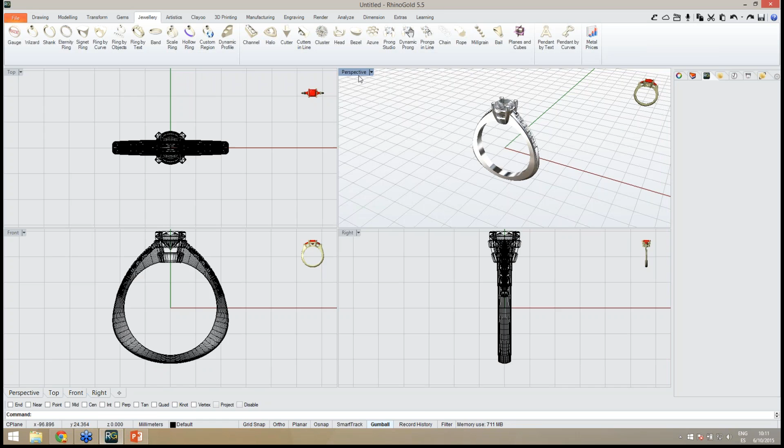We just click on the model we want to use, and now it will be added to the document. As you can see, we can load any model, and of course the big advantage of using elements is that we can customize all the parameters.

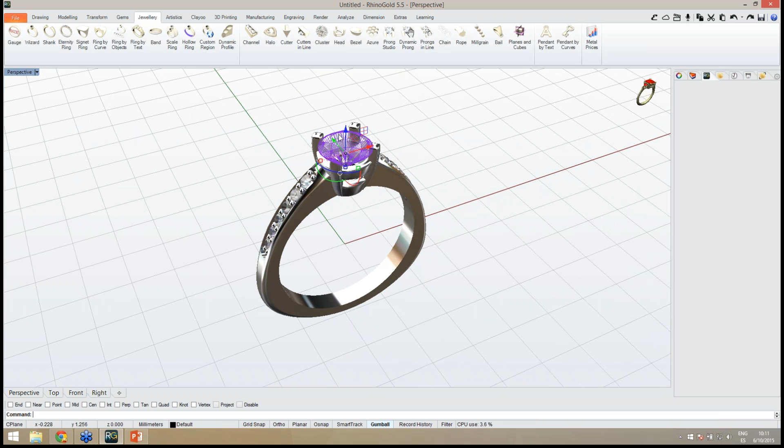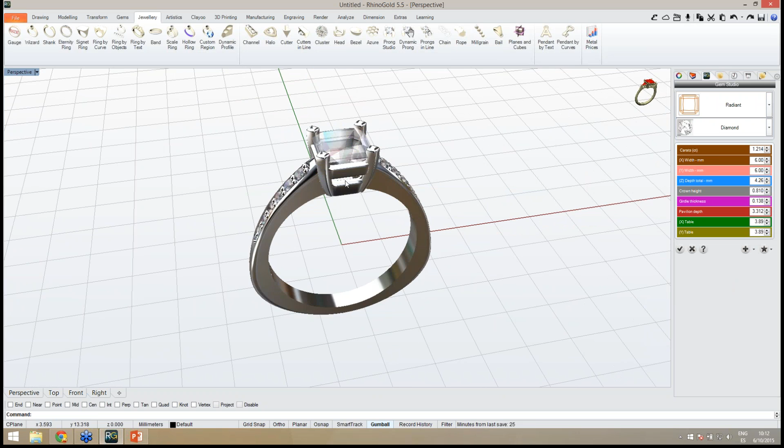For instance, let's see on this model, if I want to customize the gem, at any moment I can select the gem, edit the gem, and from here I can change to a different gem cut. Let's see what happens when we change the gem. As you can see, automatically the head will also update. So this is the main idea.

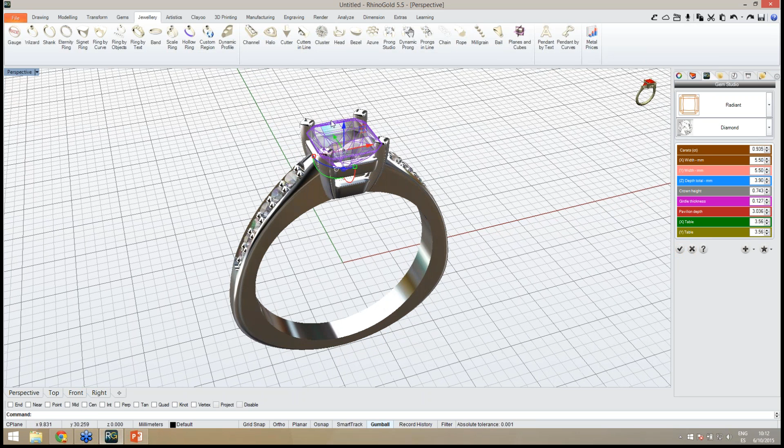We can edit everything. So let's say I want not only a different gem cut but a different gem size. If I define a new gem size, the idea is exactly the same. It will automatically adjust to the new gem, and of course the same with the head. Let's see the head and the shank.

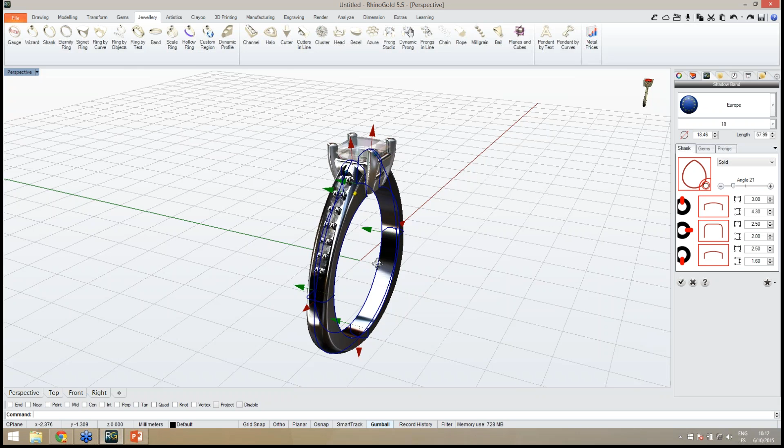If I select the shank and want to adjust any detail, for instance the number of gems, the size, all the details we can easily customize. The ring size, as you can see in the side panel, we can apply different profiles.

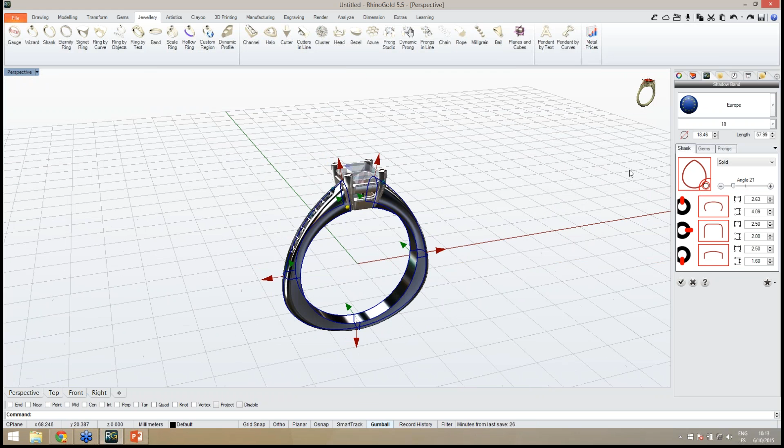For instance, this one. I can also change the main shape of the shank. Instead of this European shank, I can make a regular shank, a round shank, and easily we can use any of these elements and adjust exactly as we need.

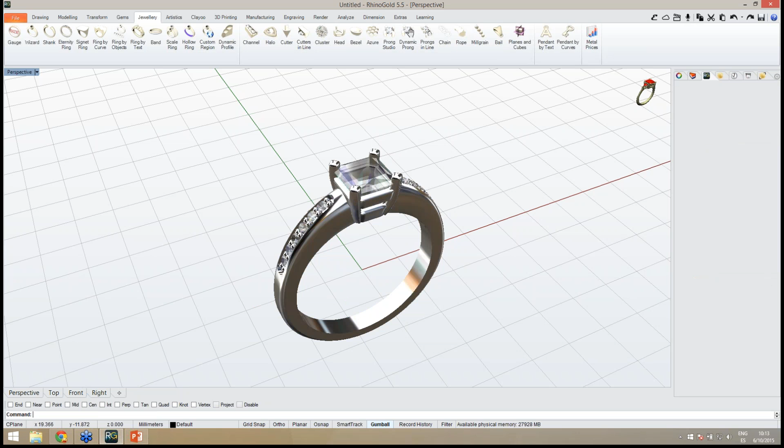We will see more parameters, more features, but I also want to show how easy it is, from a predefined model, to adjust the parameters, and we can easily create a render. As you know, let me show you.

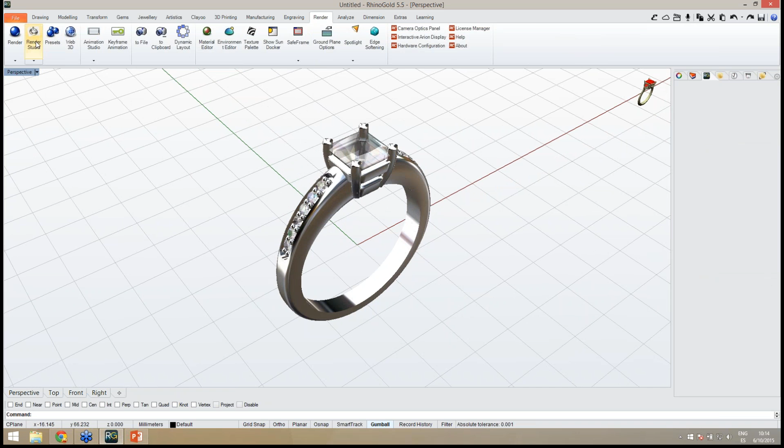From this model, we can show the customer a photorealistic image. Let me apply the render materials. As you can see, when I open the render studio, I have all the render materials in this side panel.

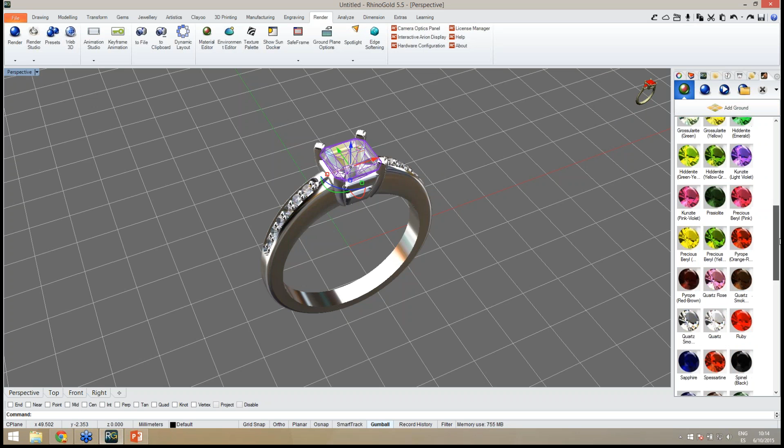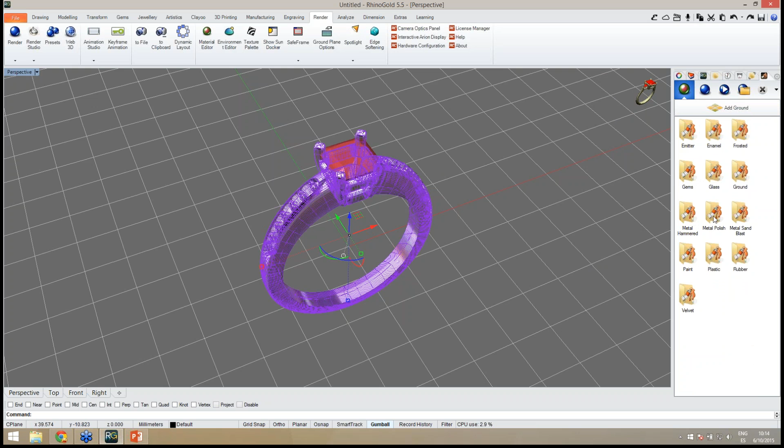For instance, let me show you a ruby on the main gem. Let me apply diamonds, and of course the metal. I can also apply any material, for instance metal polish and white gold, and easily create a render defining the resolution.

From here I just click on render and it will start calculating the image. Of course, we have several parameters we can define. It's calculating the photorealistic image. So from one model, easily in a few clicks we can get the image, and I will also show you how easy it is to export to STL for 3D printing.

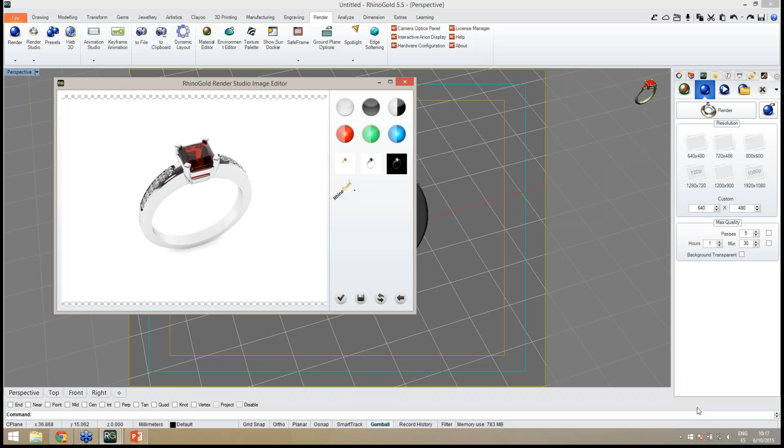Render example. Just save it, and also from here, let me just close the render, and from here we can export for 3D printing, export in STL.

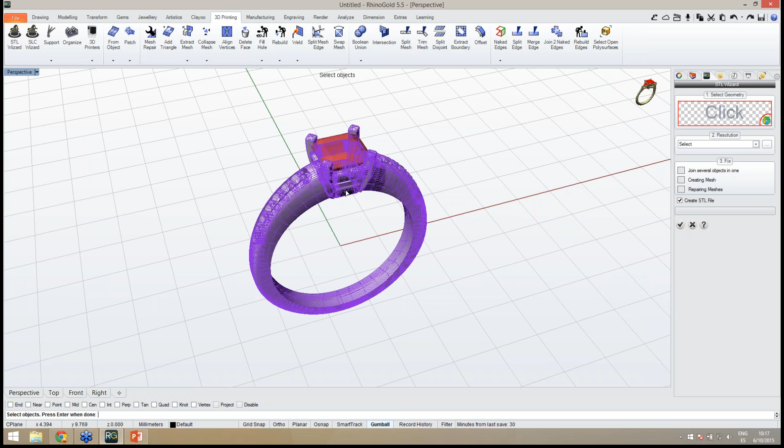So I just go to the 3D printing tab, and from this model or any other model, I just open the STL wizard, I select the objects to print, and of course the resolution, and here we go. We just need to save our file, ready to send to print.

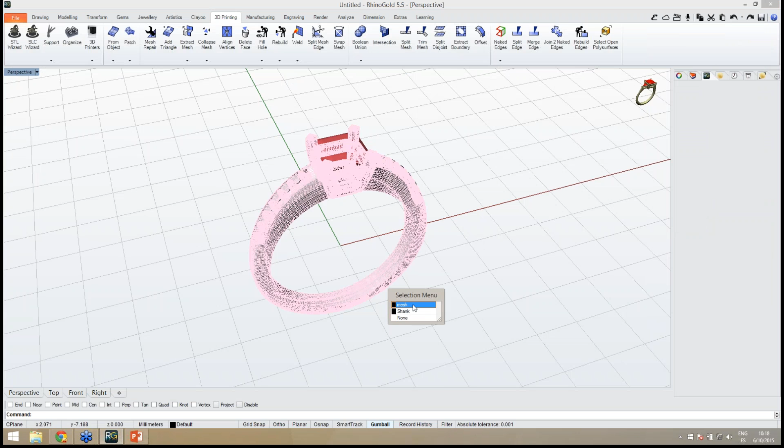As you can see, let me just show you the STL file. As you can see, easily we can send this model to print.

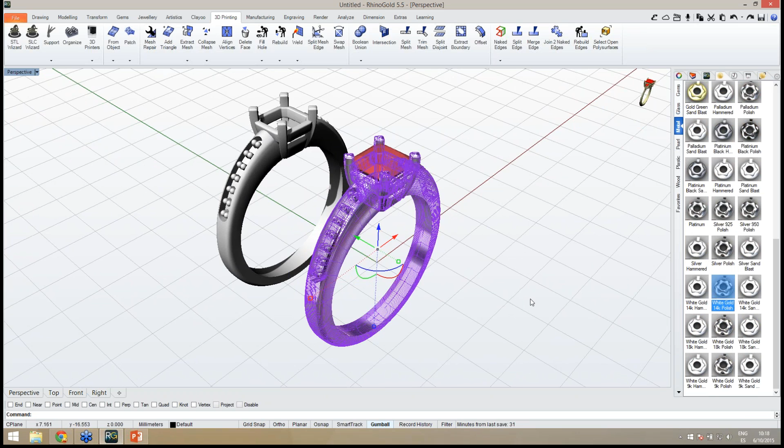We also have all the information before, let me just show you, when we have the materials applied, for instance in white gold 14 carats, we can easily know in this metal weights panel the weight for the model. As you can see, we can provide all the costs to the customer before production.

Raymond, I don't know if you want to translate, otherwise maybe it's too much. No, it's okay, I can briefly translate that.

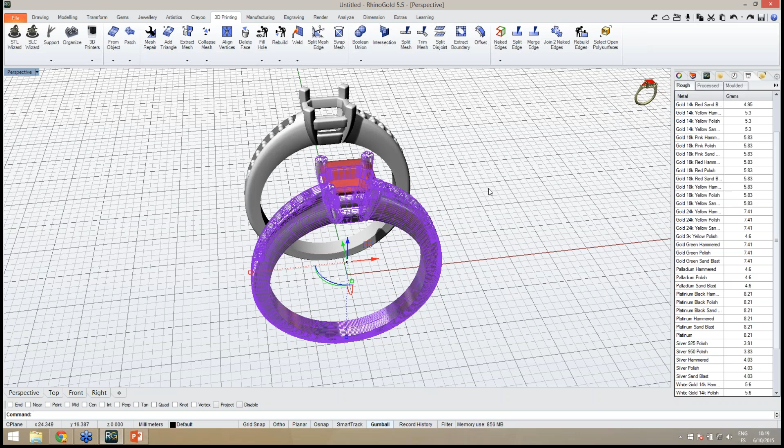Yep. So I want also to show you the other families, all the elements we have available. Let me open a new file and show you what else we have available in elements. So each different family, each category, we have several models.

For instance, we have in here several signet rings, and we can also add them, but in this side panel we can define the ring size, we can define the material before adding the model to the document. So this is the signet ring category.

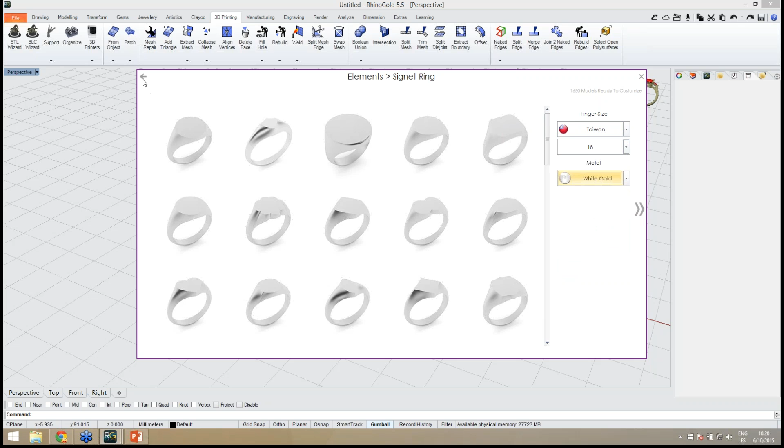We also have the wedding rings, and in here, as you can see, we have several different wedding rings available, and all of these elements are ready to customize, to adjust the parameters exactly as we need.

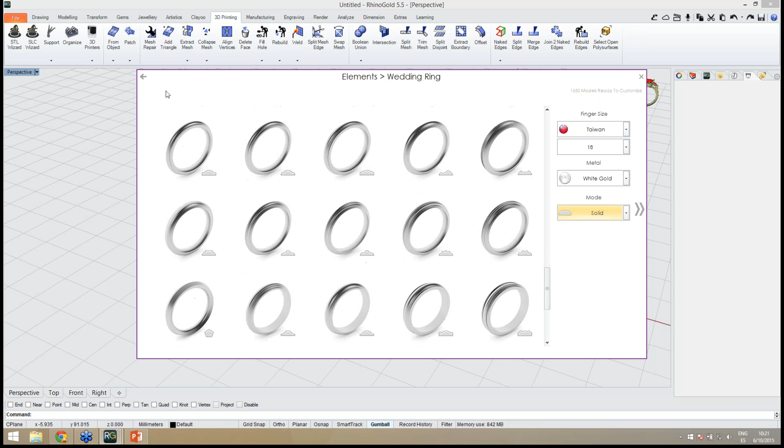So when we add the model to the document, we can define all the materials, all the ring size, all the options available. And let's see other families. We have in here, for instance, the next one, eternity rings.

And in here we have a few more options, like the material for the gem, the gem cut. So easily we can add any model and work based on this predefined model.

Now it's really fast and we don't need any CAD skills to use it. It's really easy. So this is the 3 stone rings category. As you can see, we have some models ready to customize.

And of course, shanks. There are several options using the shanks. We have lots of different shanks ready to use.

Today there are 1,650 models in this RhinoGold element, but our plan is every month we will update this library. We will add more and more models. So the idea is within 2 to 4 months, have already 2,000 models. In half a year, have 2,500 models, and of course all of these will be free for all the RhinoGold 5.5 users. I don't know, Raymond, if you would like to translate that.

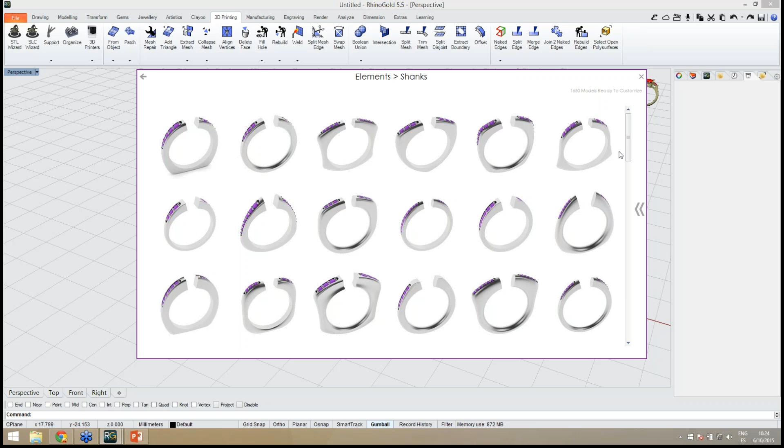Thank you very much. So here we are. We are now at the Shanks library. I would also like to show you how to combine different elements. So, for instance, if I start with this shank, and as we have seen before, we can adjust all the parameters.

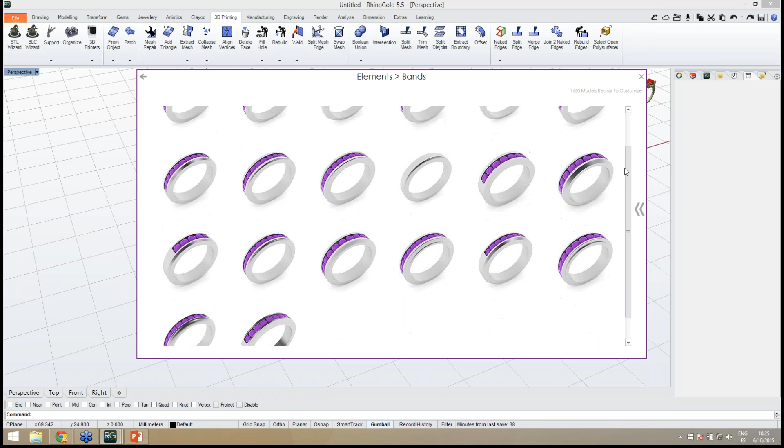But if I want to combine different elements, I just open elements again, and for instance now we have also the bands. To create the shadow band, we have, for instance, the heads. We have several heads. Let me, in this case, probably instead of a head I will use a bezel.

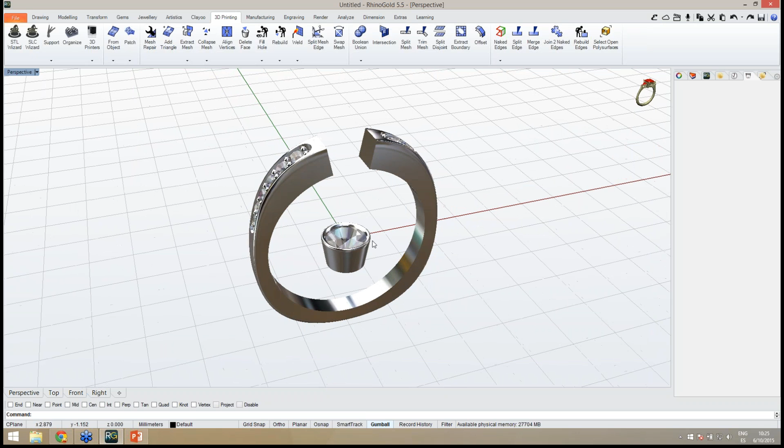So I just need to select the one I want to use, so can be this one, for instance, and easily I just select the model, I adjust the position, and of course I will just need to adjust, for instance, in this case, to edit the shank in order to fit exactly with the bezel.

So easily I can adjust the angle, I can adjust the measure. Remember, with double click we can define exactly the measure we want to apply, or we can also use these side panel parameters to adjust them.

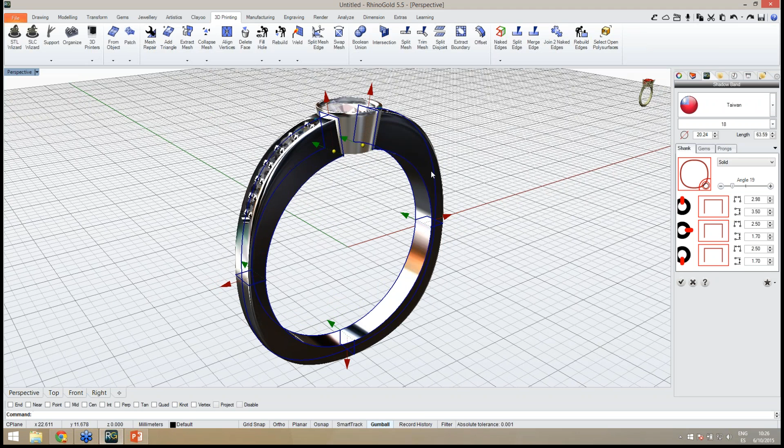Also, as you can see, for instance, in this shank, we have the straight fit inside. We can also adjust comfort fit, heavy comfort. Let me show you how it works. If I define comfort, as you can see now, we have rounded inside. We can of course adjust the height.

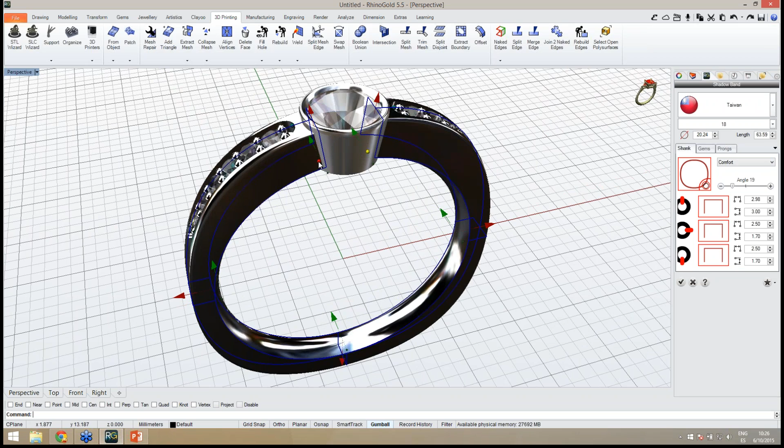Everything we can customize in a few clicks. So it's very easy and fast to define any model. So as you can see, yes, yes.

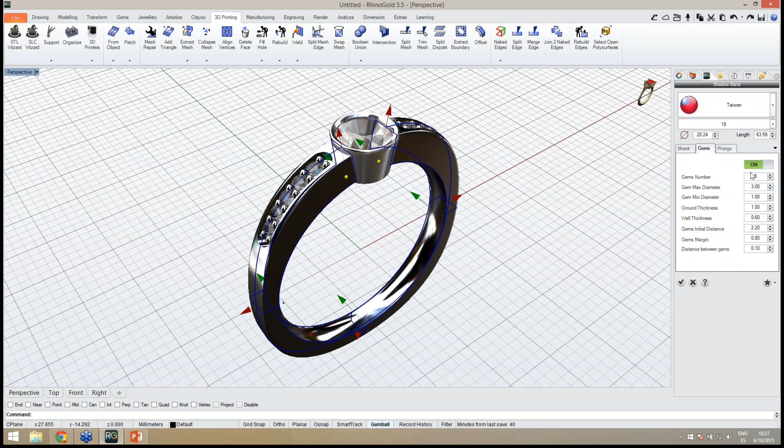Thank you. So as I was saying, we have all the parameters ready to define. Okay, now instead of 6 gems, I want 5 gems, or I can also disable the gem, so we can really customize everything exactly as we need.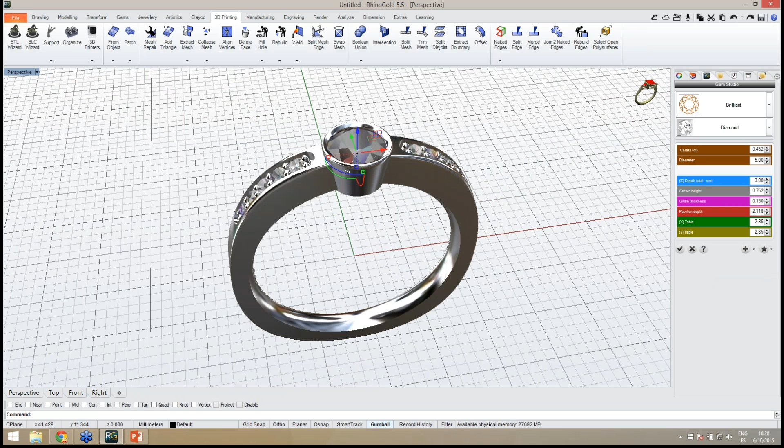Of course, also the prongs on the shank, and as we have seen before, we have the possibility to easily adjust to other gems. So I just edit the gem. For instance, I want now a princess gem cut, and as you can see, automatically we will have the bezel adjusted to the new gem cut or the new gem size.

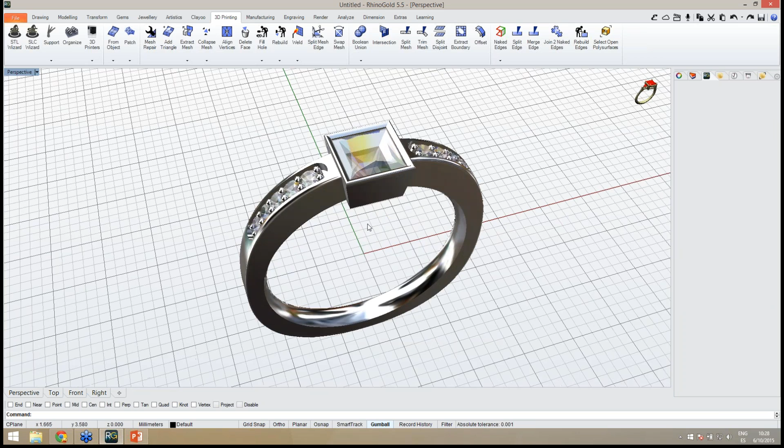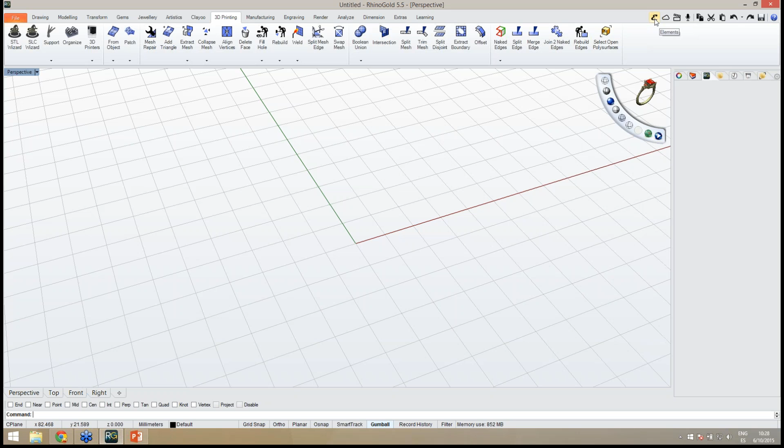So it's really easy to use it, and I believe it's now really fast to make any model or to customize all the parameters. So let's move on and see what else we can find on elements. Let me just delete this model and I will open again elements.

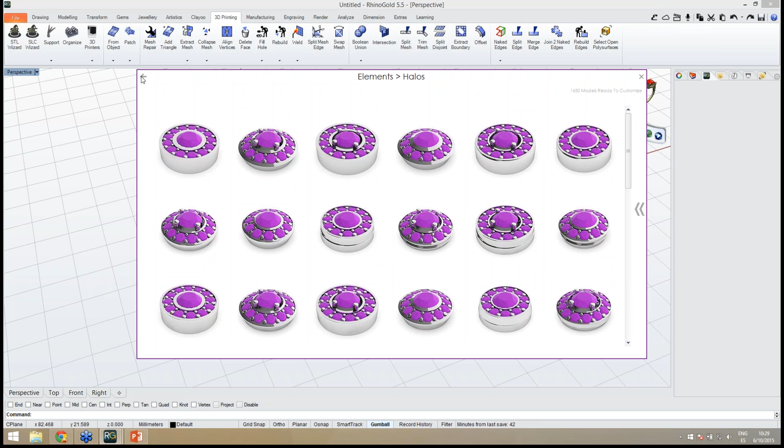Of course we have several possibilities. We have clusters, so we can use any of these. As you can see, we have several options: clusters, halos. So easily we can load any of these and adjust exactly as we need.

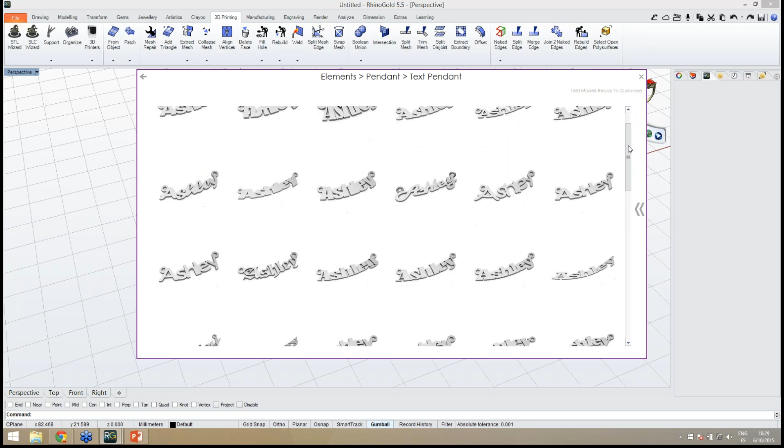And for instance, in the pendants category, we have the standard pendants, with the bail and the main gem, but we also have text pendant. So easily we can use any of these and customize the text, the font, the measures, everything. So it's really easy now.

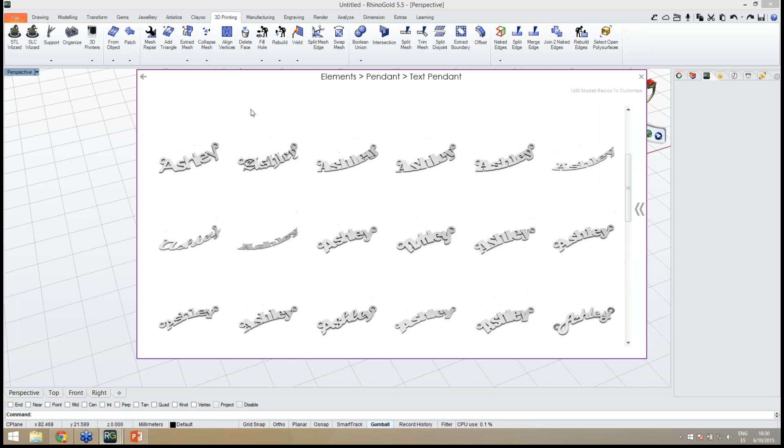Thank you very much. So as I was saying, we have the text pendants, we have also the curve pendants, and in here we can load any curves and automatically it will adjust to the parameters we define. There are really lots of options, as you can see.

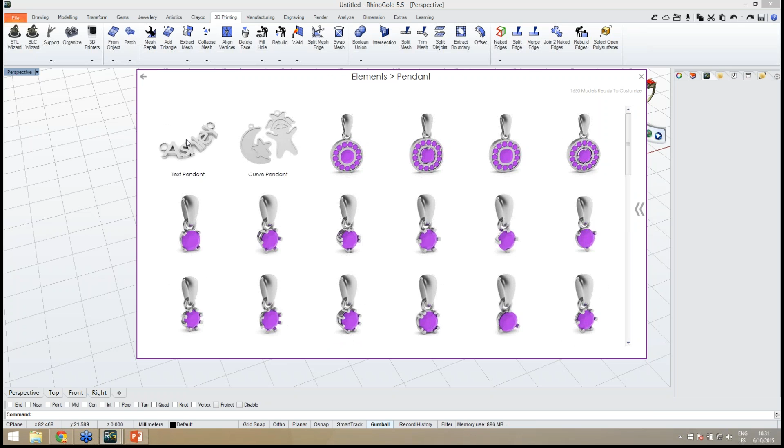In this case, the pendant family. We have also the earrings. So as you can see, we have different types. We have hoops, we have with gems, we have a few different options. And of course, we have also some bracelets. As you can see, we can start from any of these and customize as we need.

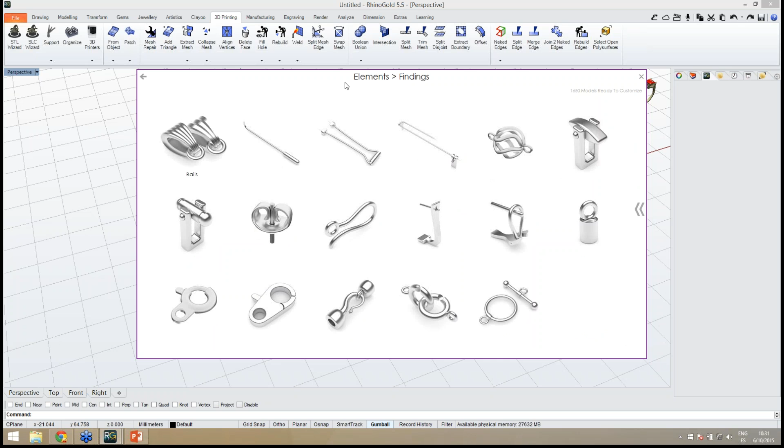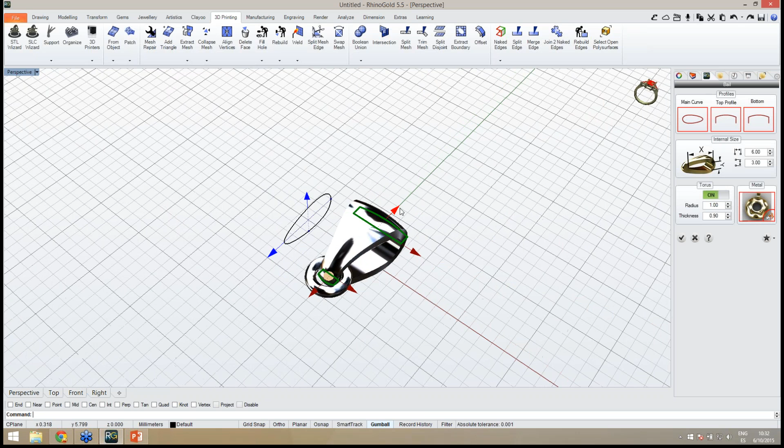And of course, the findings, as you may know, it was already available in RhinoGold, but now we also have the bails completely. We can customize easily any bail, so we can just load one of these, and now we have also the options to edit and of course adjust the measures or different profile. For instance, I want to create a profile like this. So this is really easy now. This is just an example.

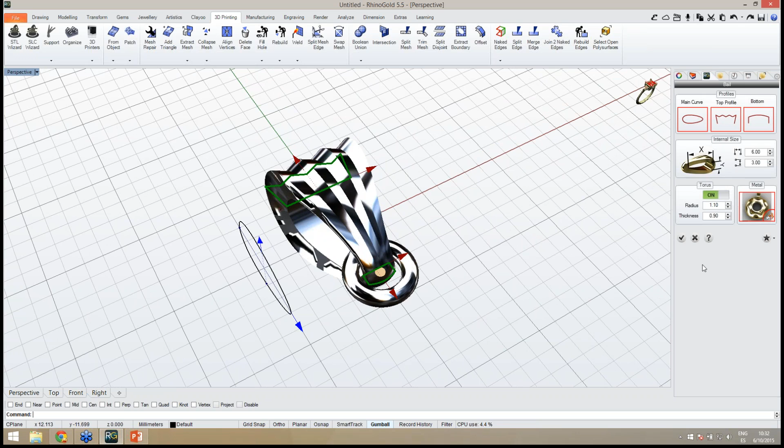We have also the torus options, the radius. We can easily define the position and of course the material. So as you can see, it's really interesting. Let me show. Okay. May I? Yes, of course.

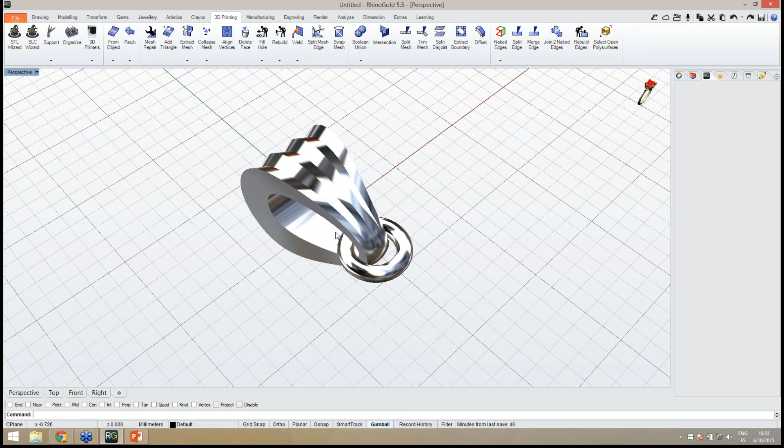So let's see what else can we find under the elements. And so now we are loading, and there are also several text options. We have text pendants, as we have seen before, but we also have text rings, and we can easily define any text. So easily we define the words, and of course remember we can edit, so it's really fast now.

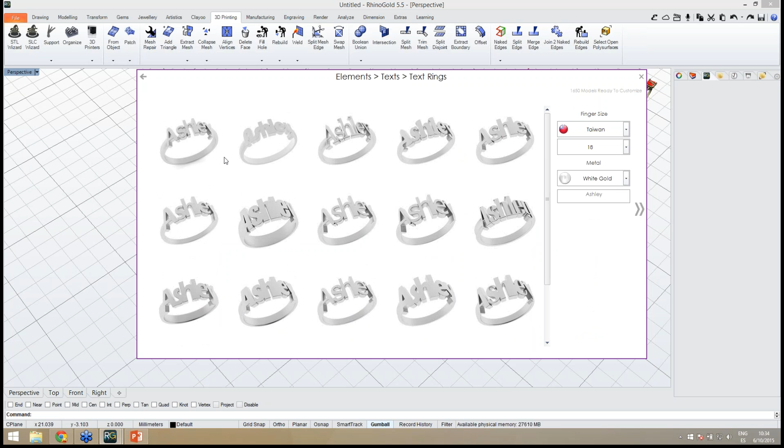For instance, these text rings, we have letters, so in here we will find several different fonts, and of course inside each one we have all the options ready to be used. So what else we have? Let me just go back.

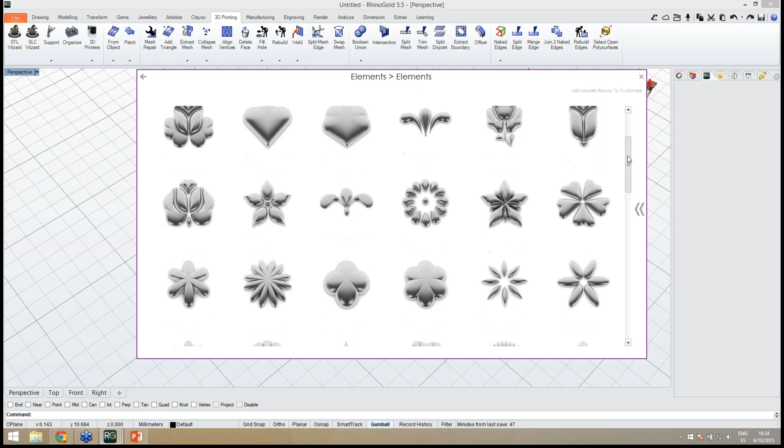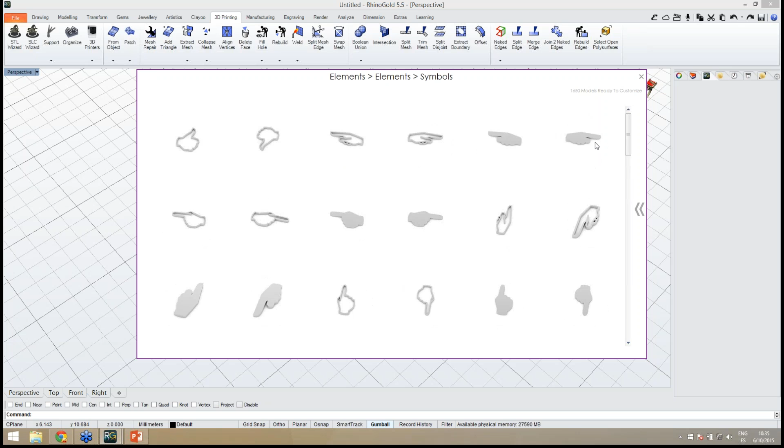And in here, the elements family, we have, as you can see, different elements, different models ready to be used. And of course, from here, we can adjust the measures and apply these different models on a ring, on a pendant. We can easily combine all these elements. Of course, we have in here also the symbols, and in here we will find many more, as you can see. So there are very much to be used, and of course combine all of these to create a custom model.

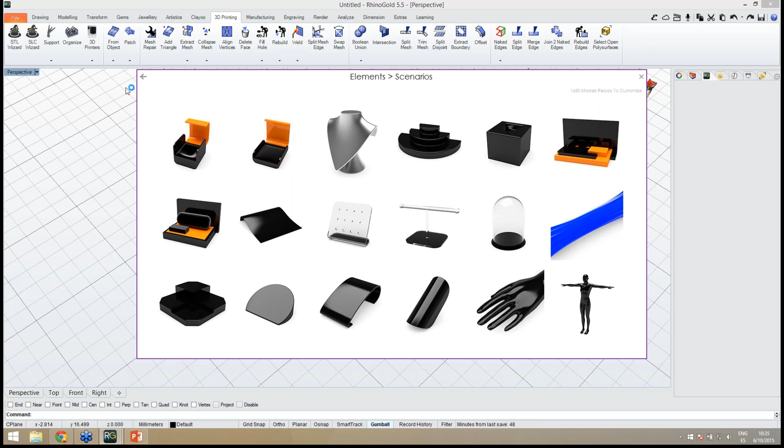So also the scenarios are available if we want to create a photorealistic image or an animation with all these options. We can, for instance, use one of these scenarios to improve the quality of the presentation. So let's take a look a little bit on how to edit, or how to play a little bit with these options. For instance, let me start with this model, this 3-stone ring. And Pedro, may I? Of course.

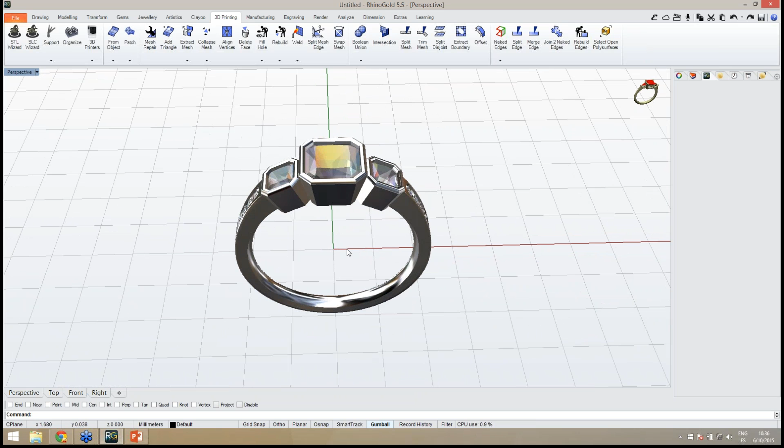Thank you, Raymond. Thank you very much. So, for instance, once again, it's really easy to adjust the gem size, and it will automatically adjust the bezel. Of course, we can at any moment edit the bezel and adjust or create one arcing here, so easily we can customize the model as we need.

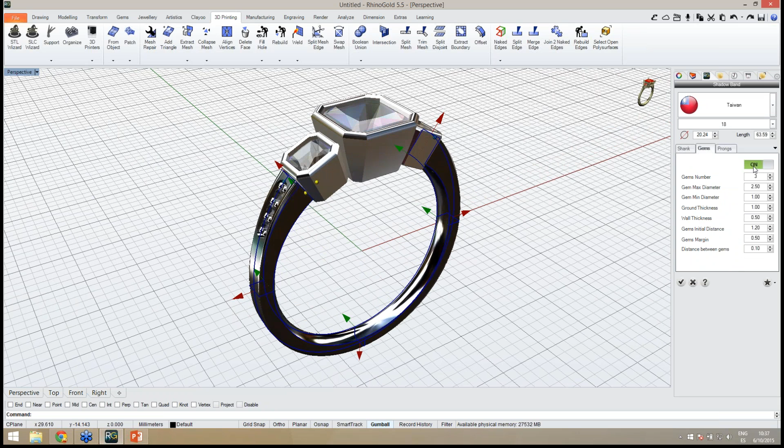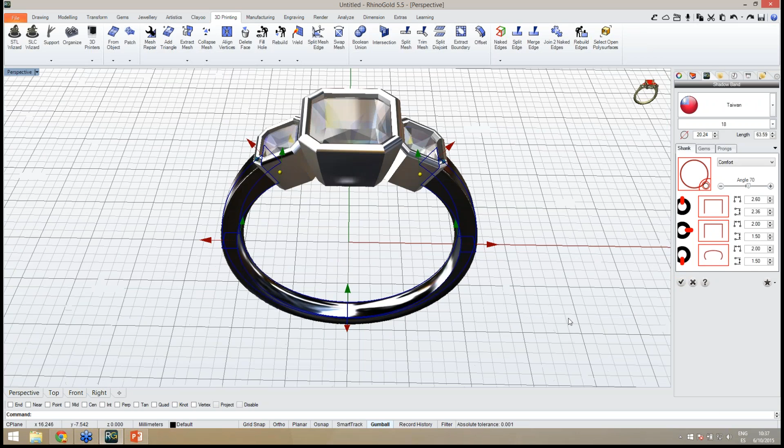The shank, once again, for instance, in this shank I don't want to use gems, I can just turn off the gems, and as you can see, the angle, the measures, or even the profile, really easy. So for the elements, this is the idea. I don't know, Xavi, if you want to see anything else we didn't mention.

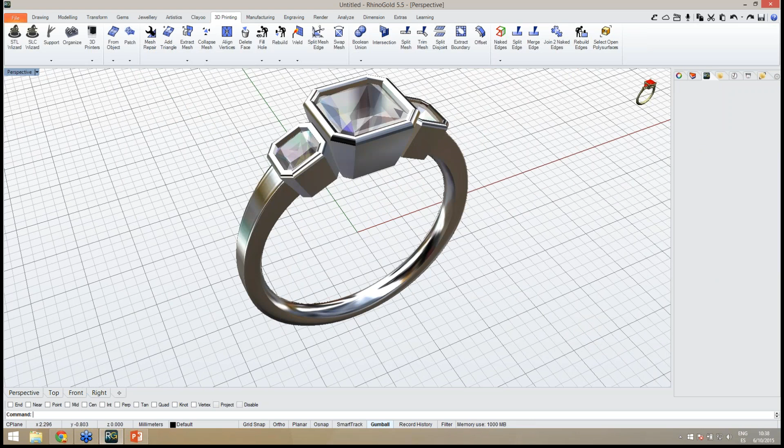No, I just want to say that RhinoGold Elements is meant to be a very powerful tool that people without computer skills, as you have showed now, they can create their custom designs in a very easy and fast way. Of course, RhinoGold keeps being a full CAD software, so there are all the tools to design from scratch, to design shanks, heads, bezels, gems. We have all the modeling tools necessary to design from scratch. But what we wanted to offer with RhinoGold Elements is to give the possibility to the designer to create very fast, so they can focus more in the creativity part rather than the modeling itself.

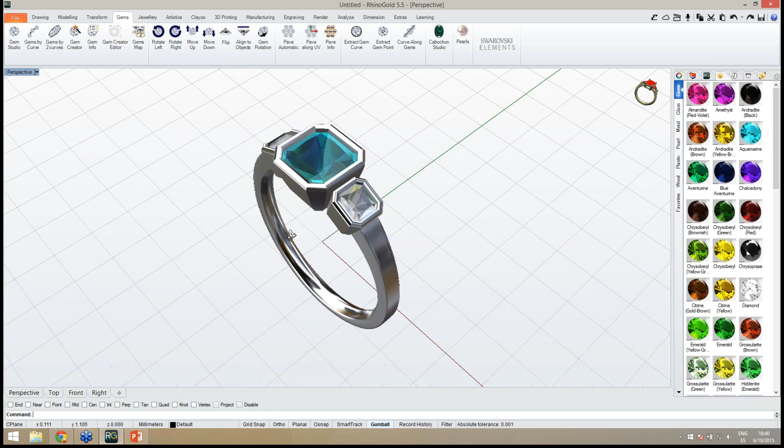And also, I would like to say that with RhinoGold Elements, we discovered back in JCK Las Vegas that what the customers were saying is that now with RhinoGold Elements, they can sit with their customers. They can sit both in front of the computer, and the designer and the customer, they can both participate in the designing process very easily. They both participate in the creation of the jewelry, and this will open to a new market for retailers, for sales associates in jewelry stores. All of this allow RhinoGold Elements to make everybody participate in the designing process.

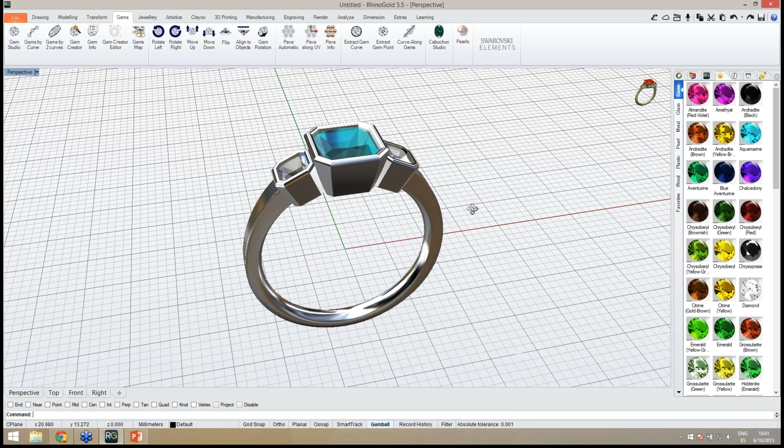RhinoGold Cloud is a new marketing tool to publish your model from RhinoGold to the web as a 3D viewer and be able to define materials where the web visitor can easily change materials. This is very new, almost like RhinoGold Elements.

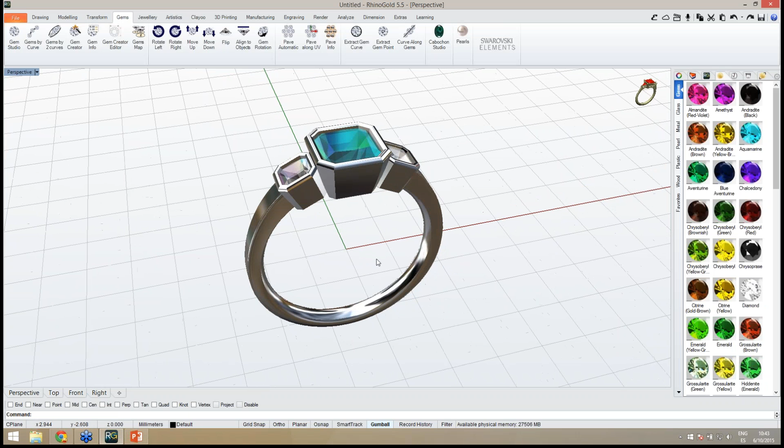So I think we could show now, of course, from RhinoGold, just creating something very fast in RhinoGold Elements and publish it on the RhinoGold Cloud and actually get the direct link. Great. And they will see that in 3 minutes we will have something created in RhinoGold and publish it on the website. So let's go, Pedro. Let's go. Just give me a minute.

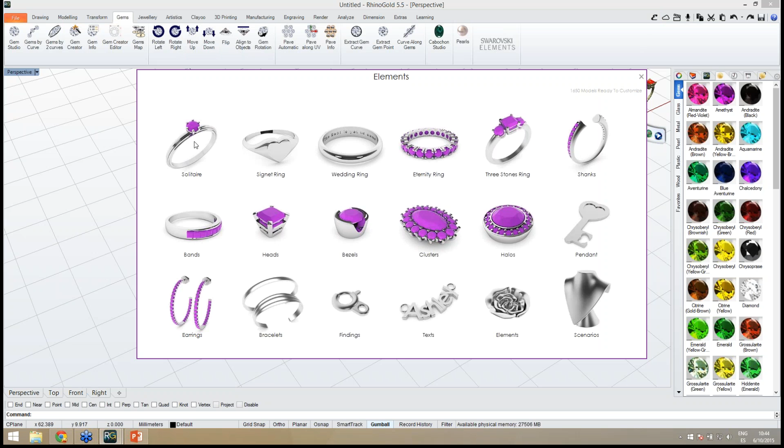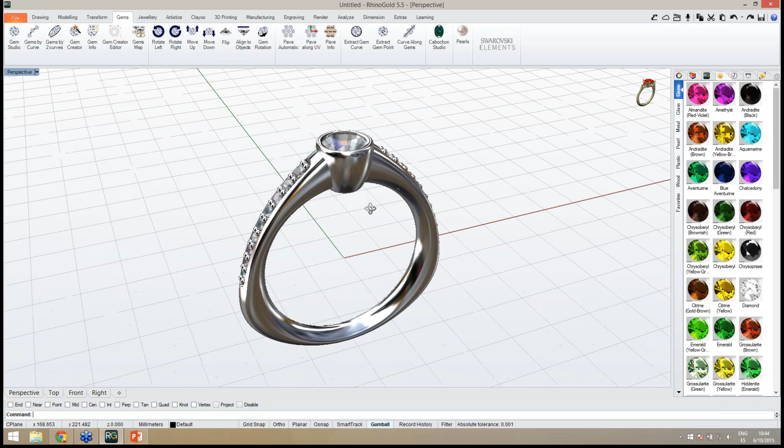Thank you, Raymond. So for instance, I'm going to use a solitaire based on the elements, just to show you how easy it is to publish a model. After defining the model, of course, we can edit as we have seen before. But after defining the model, as you can see, we have the cloud, RhinoGold Cloud available as well.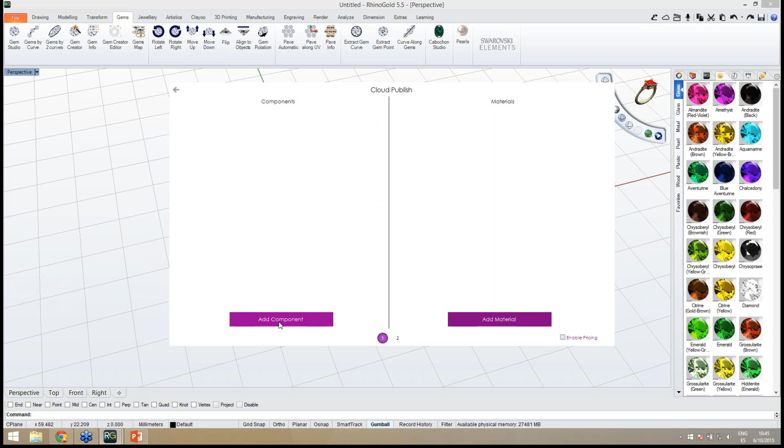And from here, these are different categories I defined before, so each user can define its own categories. And for instance, when I want to publish a new model, I can define just any of these categories. And now I have the option to upload a new model. So for instance, I will add a component, in this case the metal, and I will select the shank and the bezel, and I can of course define the name and the materials.

So we have the material applied on the object, but of course I can provide more materials to be used. So easily I can add 14 karat yellow gold for the metal, or any other. We have all the materials available. So when the visitor is checking the model, he can customize the material.

Of course, we can also add more components. In this case, for instance, just the main gem, and I can define the name, of course. And once again, we have all the materials available. So I can define, okay, this main gem is available in diamond, in aquamarine, in ruby, in sapphire. Let me just select emerald, for instance, so as many as we want. As you can see, I will define the main gem to be available in all these materials.

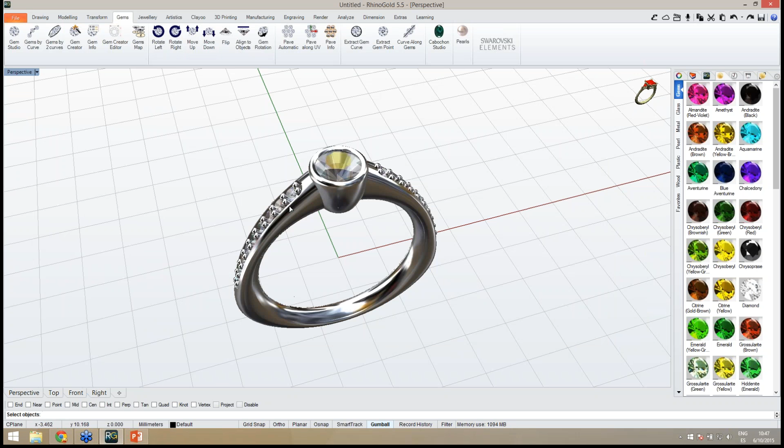And of course I can add another component, and I will select now the gems, the small gems on the shank. So I will call this shank gems, and once again I can define the material. Okay, so once again I just say I want it to be available in all these different materials.

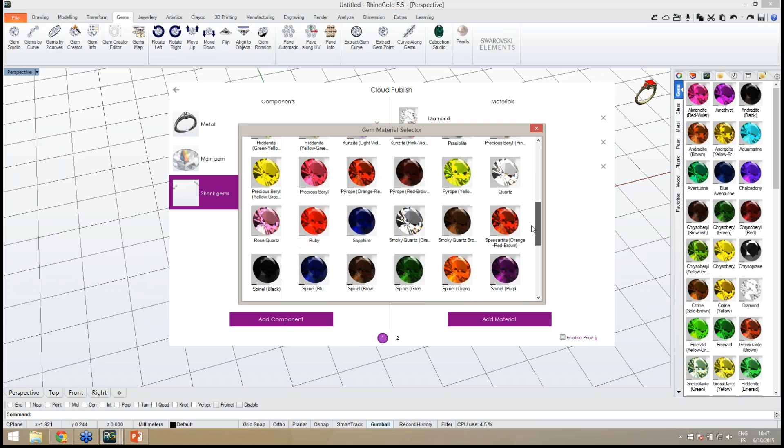Okay, and one more, and after this, of course, we can define the price for each one, the metal, the gems, and then after this I just need to define the name and of course the description. We can define all the parameters and of course apply to any category we already defined or create a new one.

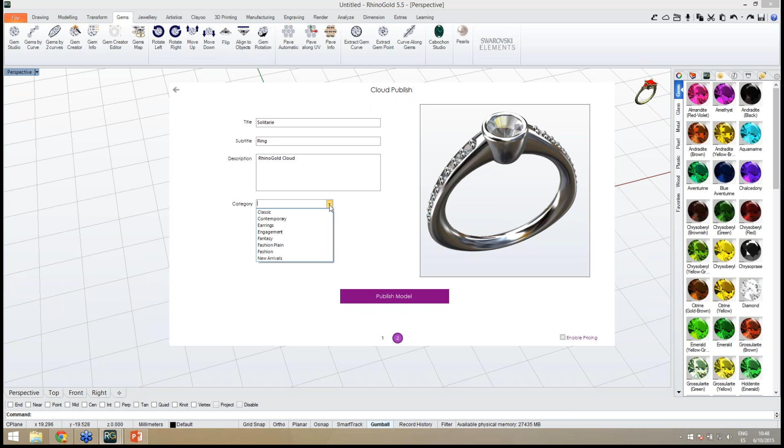So let's say I want to apply this to this category, and after this I just publish my model to be available online. Okay, as you can see, it's very easy to publish.

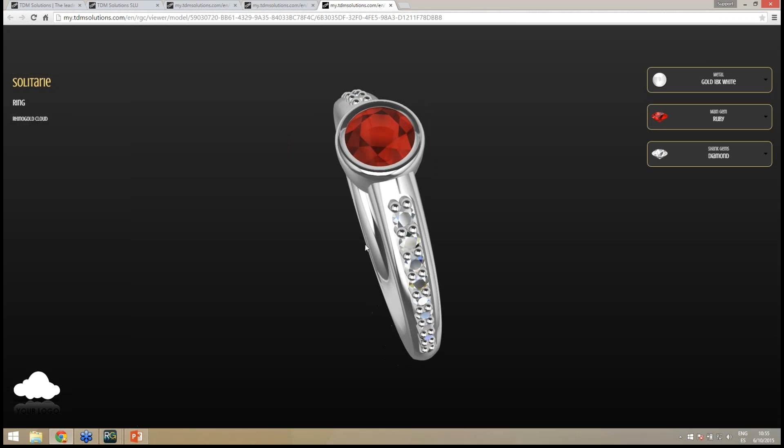Okay, so in this webinar, we wanted to show basically RhinoGold Elements and RhinoGold Cloud. I think these are the two main tools of RhinoGold 5.5. Also, as I said, there are new modeling tools like the shank, the bail, the text pendant, all these modeling tools that I believe we will have time in the future to show in new webinars, to design jewelry from scratch. But in this webinar, we wanted to focus on RhinoGold Elements and RhinoGold Cloud.

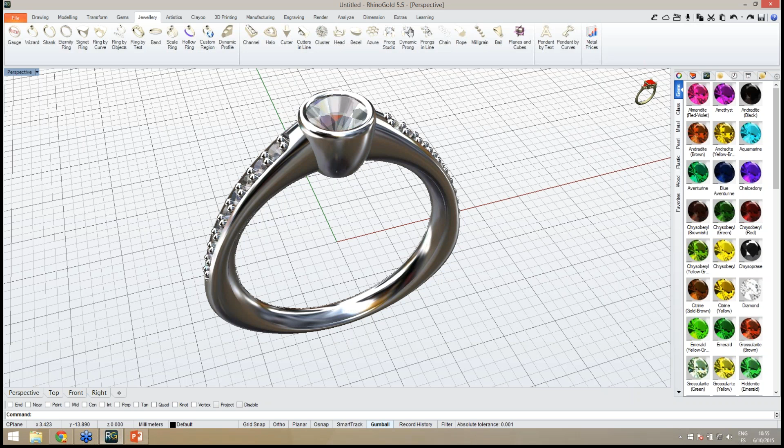And I don't know, Raymond, if you would like to add something else. Okay, yeah, maybe I would like to mention training.